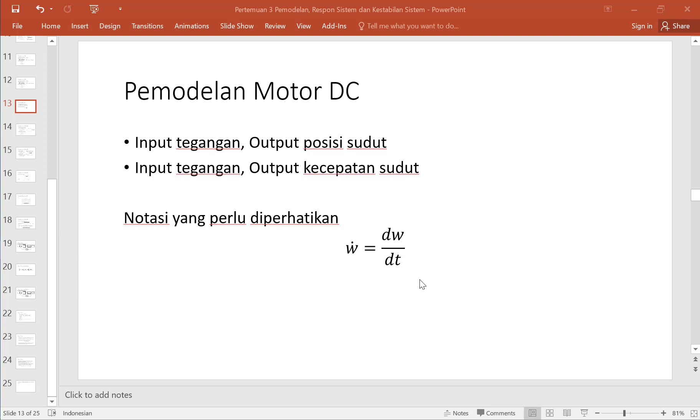Okay, in this video, I will show you about the modeling of DC motor. I will explain using two languages.

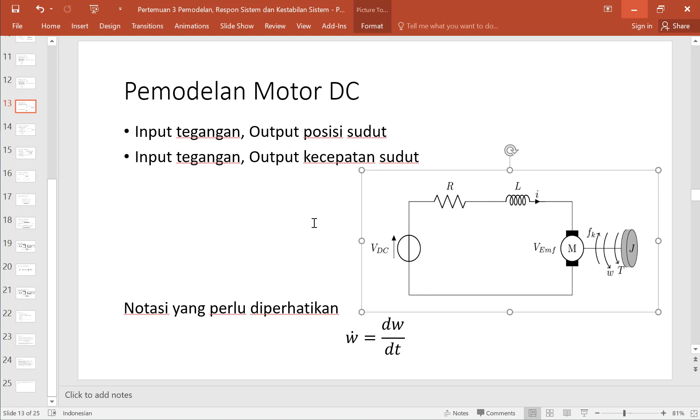Okay, this is the analysis using the Kirchhoff voltage law, and then the analysis using the Newton second law about the rotation here.

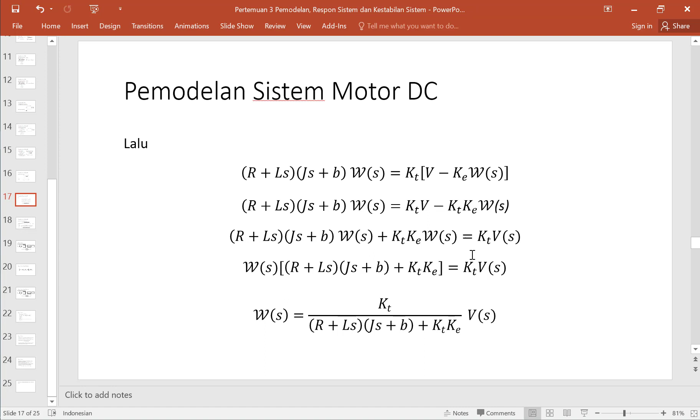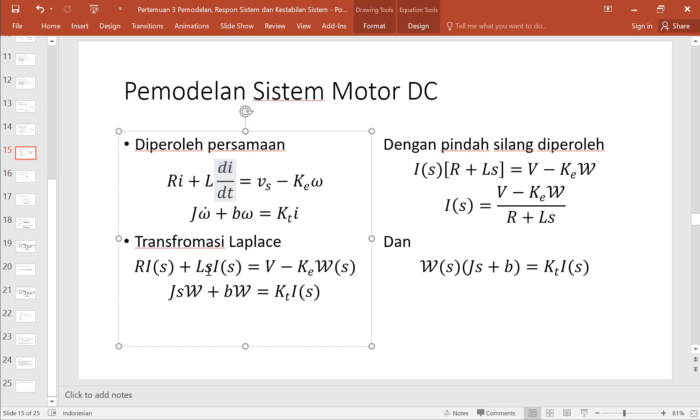Sebelumnya saya akan menjelaskan dulu, bagian DI per DT ini berubah menjadi I kali S. So this part is changed to be this, and this part to be this. Bagian J omega dot ini berubah menjadi JS omega. Jadi bagian derivatif atau dot itu dikali dengan S. So for the Laplace transform, the derivative will change to the S variable, multiplied by S.

Okay, we will continue from the last section. This is the substitution process. So we need to get this, and then multiply this, and then we must change this variable from right to the left here, and then we can get omega here, and get the DC motor equation in the transfer function form.

Jadi kita perlu lakukan pindah silang. Ini dikalikan dulu, kemudian kita pindah silang. Setelah itu kita akan memperoleh model fungsi alih dalam bentuk transfer function.

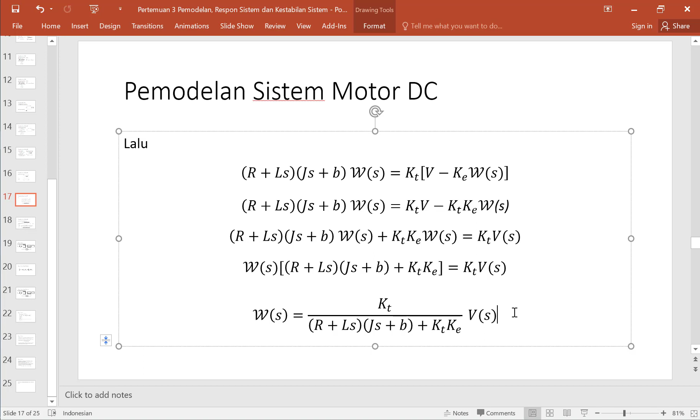Okay, after we get the DC motor model in the transfer function, setelah kita mendapatkan model motor DC dalam bentuk transfer function, kita bisa masukkan nilai parameter dari motor DC. So we can change this variable to this value.

And then we can get the DC motor model in the transfer function form. Setelah itu kita akan memperoleh model motor DC dalam transfer function.

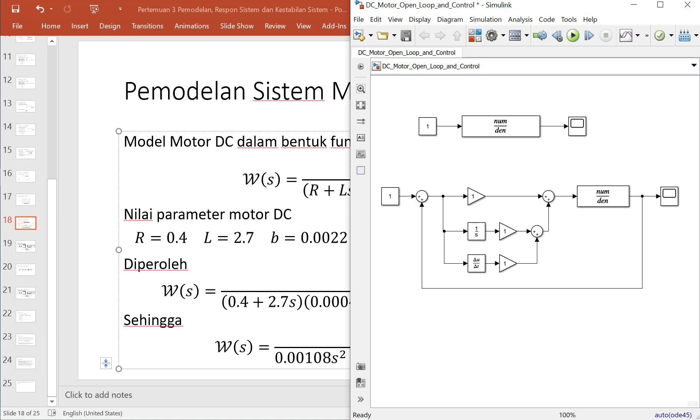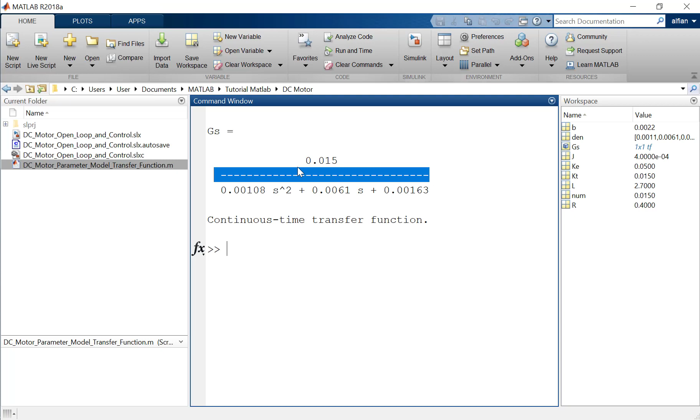Selanjutnya kita akan lakukan simulasi open loop dan closed loop. After we get the DC motor model in the transfer function, we can use MATLAB to simulate the DC motor model. So this is the variable, and this is the variable from the num and also the denom, and then we can run this code and get the system in transfer function form with the value.

Jadi kita akan tuliskan dulu variabelnya, kemudian kita buat dalam variabel num dan den dalam bentuk matriks. Lalu kita jalankan perintah ini, maka kita akan memperoleh model motor DC dalam bentuk transfer function. Selanjutnya kita akan lakukan simulasi, yang ini open loop, dan yang ini closed loop yang pakai pengendali PID. So this is the open loop simulation, and this is the closed loop simulation using the PID controller.

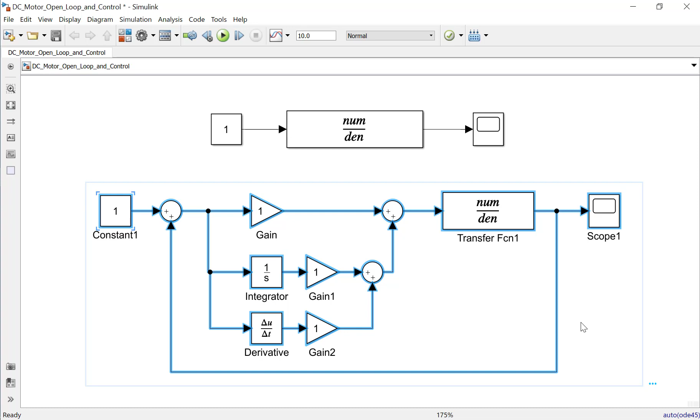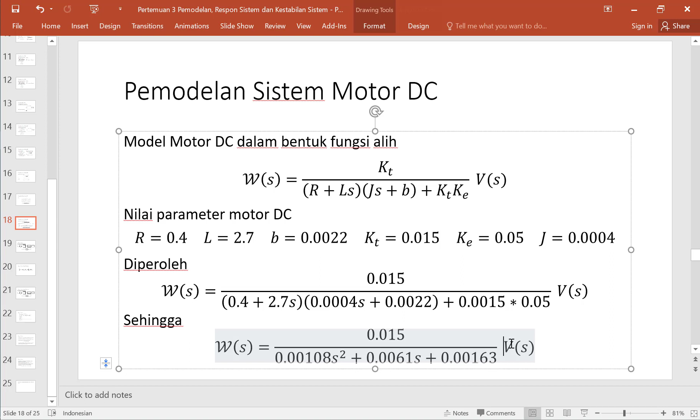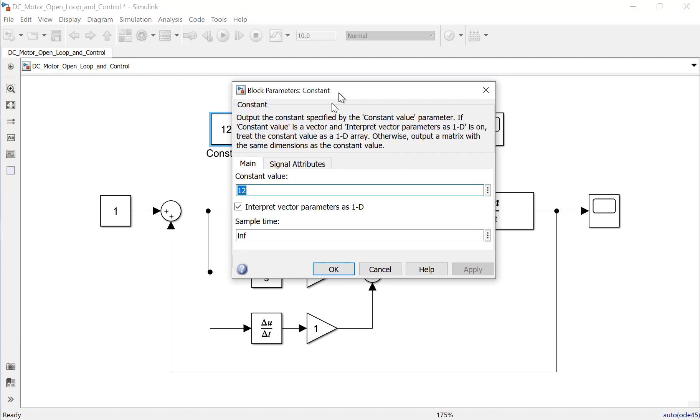Okay, for the open loop we will use 12 volts. So from this model we know the input is the voltage, and the output is the angular velocity, omega. We will input a voltage of 12, and then see the angular velocity in this scope.

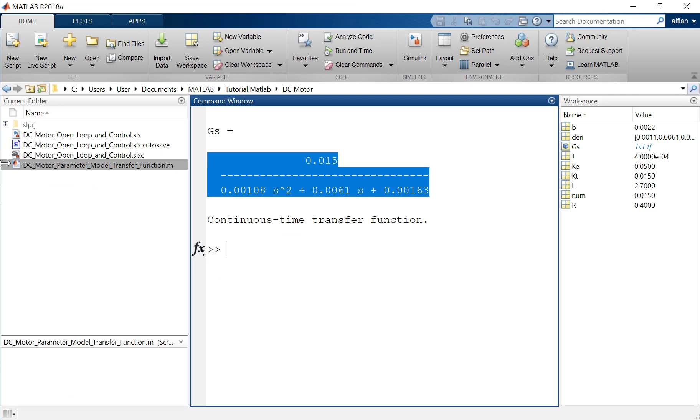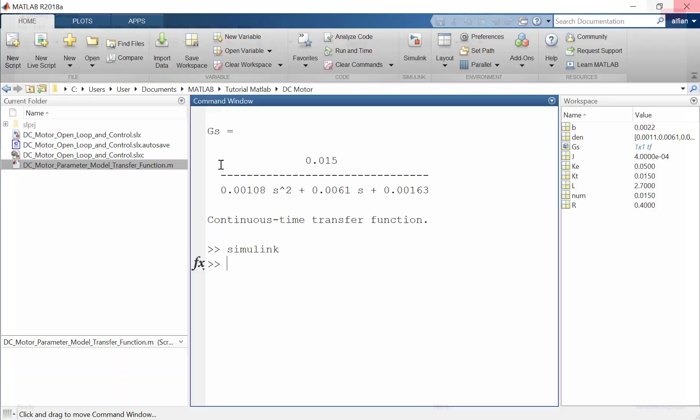We need to add the scope from the simulation block. First we need to create the simulation in Simulink. Just type Simulink in MATLAB like this, and it will open. If you want to create this simulation in Simulink MATLAB, you need to write the Simulink command here, then you will see the Simulink feature, and you can add a blank model or new file, then open this Simulink block.

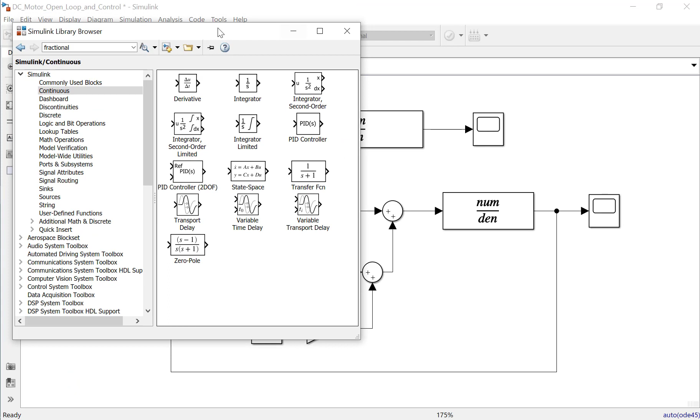You need to input the scope from the sink, then add the transfer function here. Please click this part to open the Simulink block. Then insert the scope from the sink section, the transfer function in the continuous section, the constant in the source section, the integral and derivative in continuous, and from commonly used blocks insert gain and sum. Those are the blocks we need.

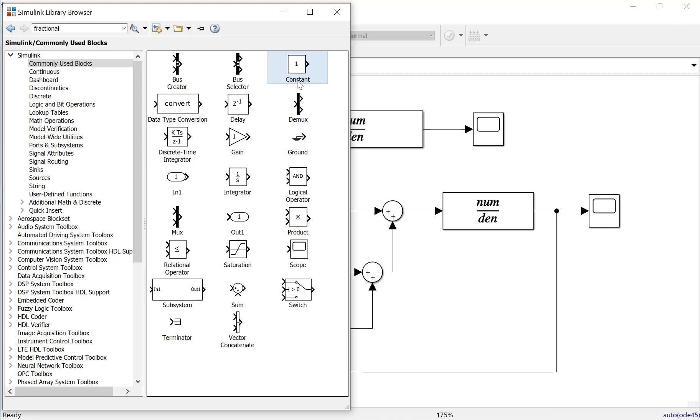So there are some blocks that we will need. From the commonly used block, we need to add the sum, the scope, and the gain, and then the constant. From the continuous section we must add the transfer function block, and from source the constant, and from sinks the scope. We also need the integrator and derivative from continuous.

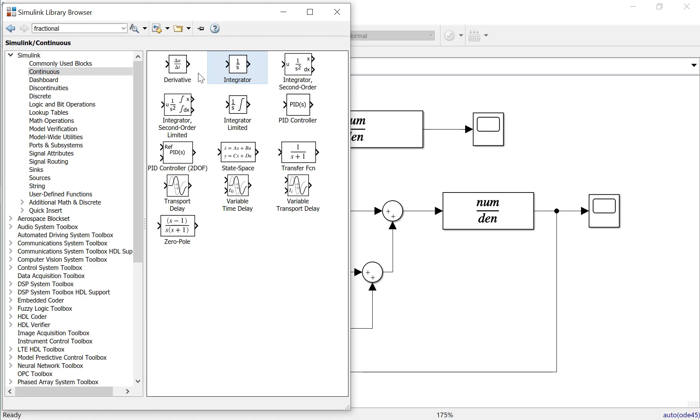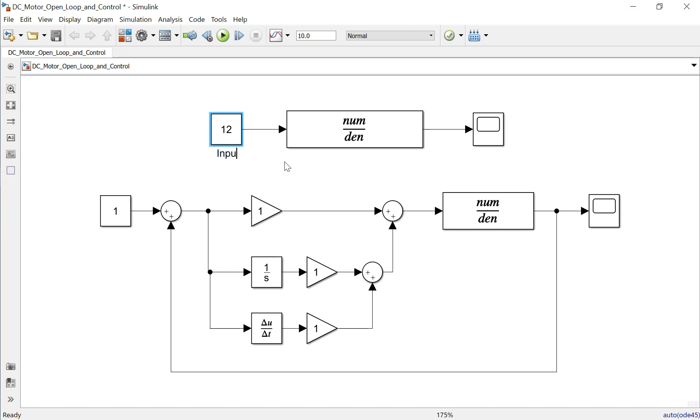Next we will give an input voltage of 12 volts, and this is the angular velocity. This is the DC motor model, an approximation model. So this modeling is only an approximation.

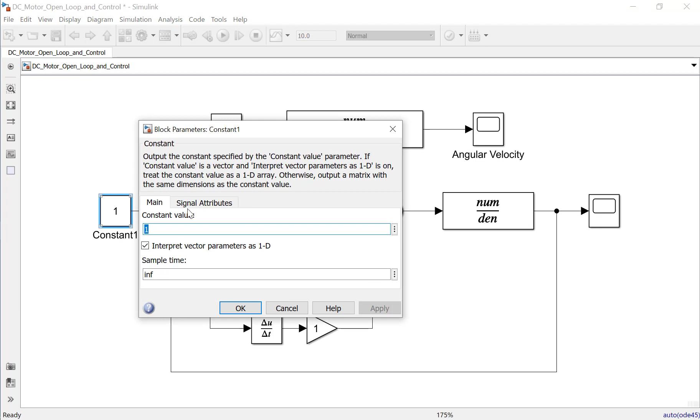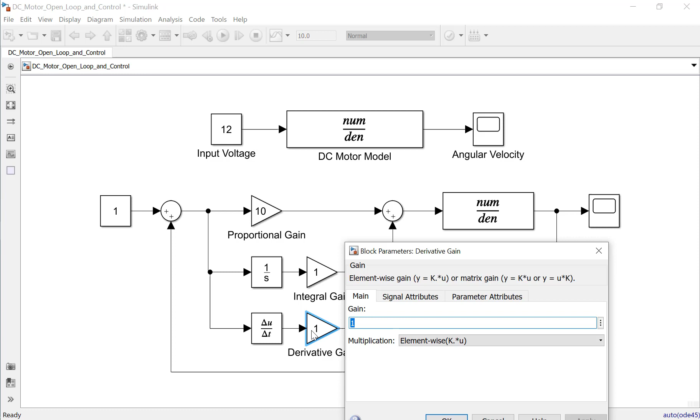Okay, and then we will give the variables for the proportional gain, and the integral gain. This is the PID controller, with proportional, integral, and derivative. Let's try giving values of 10, 1, and 0.5 for these gains.

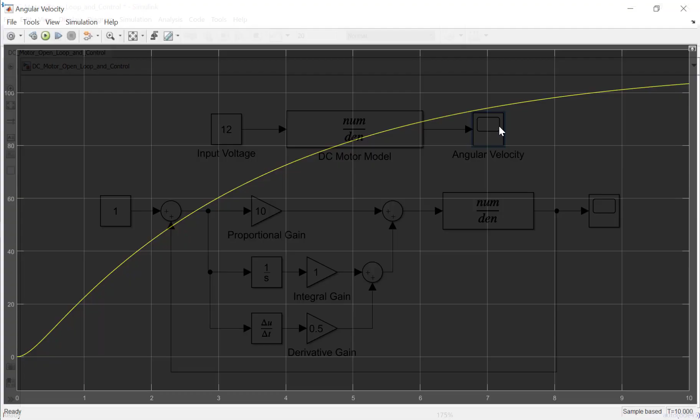We will run the simulation to know the result. So the upper part is the open loop part. We can see when given 12 volts, the result will be like this. It will rotate from speed 0 to a certain speed. So we can see from this result that the angular velocity will increase from 0 to some value.

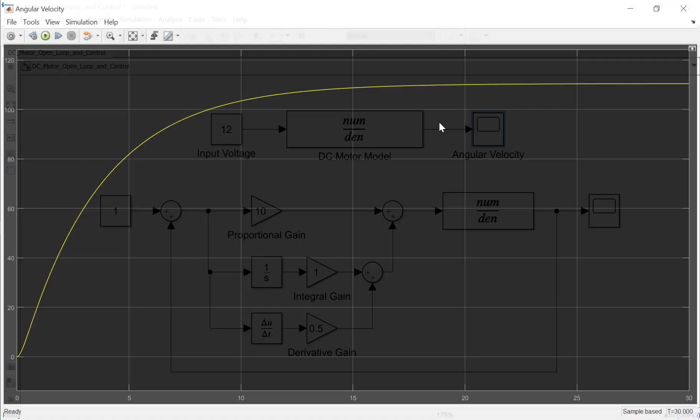We will extend the time of the simulation. Let's try increasing the simulation time to 20 seconds to see the result, then try increasing it further to 30 seconds. So we increase the simulation time to 30 to see more of the result. This is the result from the open loop simulation, and now we will see the closed loop simulation.

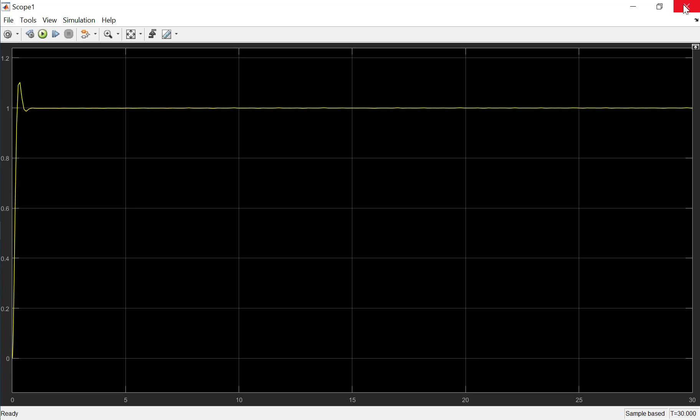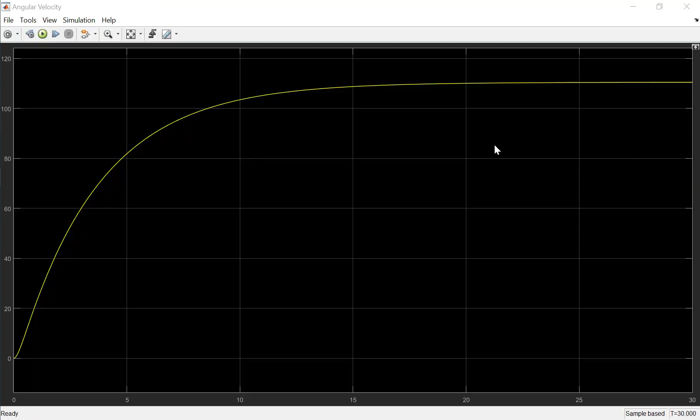You can see from the open loop simulation, the response is very slow. So from the open loop simulation, we see the response is very slow. We need the controller, this PID, to make the system faster. We will change this reference to be 100 here. You can see the response is better than before, it is faster to reach 100 RPM.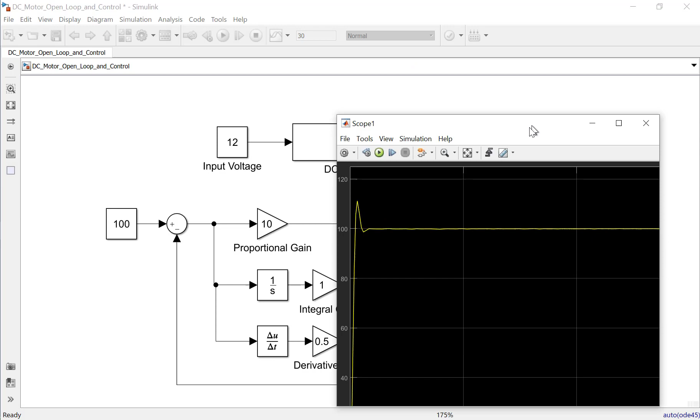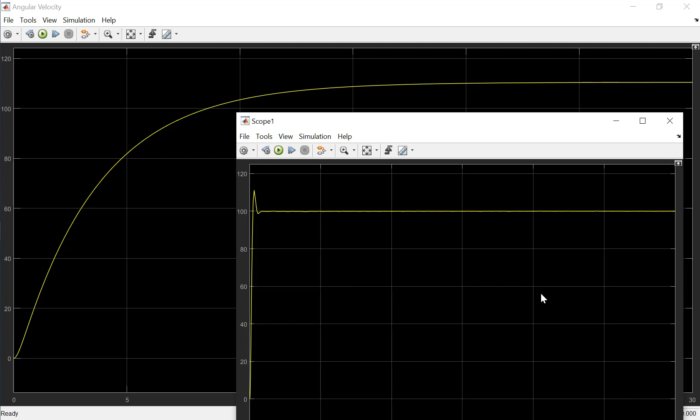So we can compare, the response is much faster when we give it a PID controller. So actually, by giving a controller to the system, it can also speed up the system's response. If we add the controller to the system, it will increase the performance better than before. This is the open loop simulation, and this is the closed loop simulation using the PID controller. So the controller will increase the performance of this motor system to reach the set point of the reference.

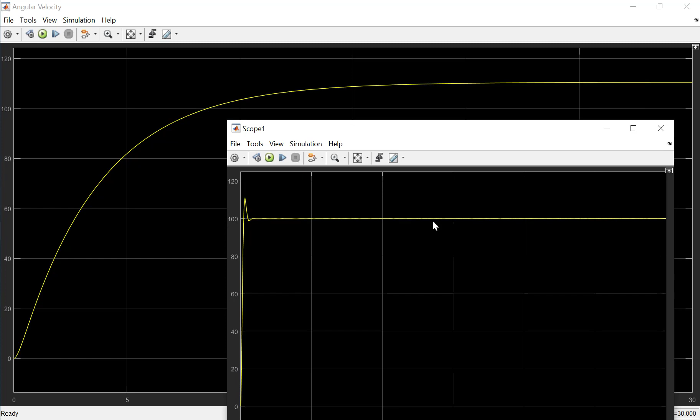Okay, I think that's enough for my presentation and material about the modeling of DC motor, and also creating the simulation in Simulink MATLAB. Perhaps that's enough regarding the modeling of DC motor and the creation of open loop and closed loop simulations in Simulink MATLAB to see the characteristics of the DC motor. I hope it can be useful for you.